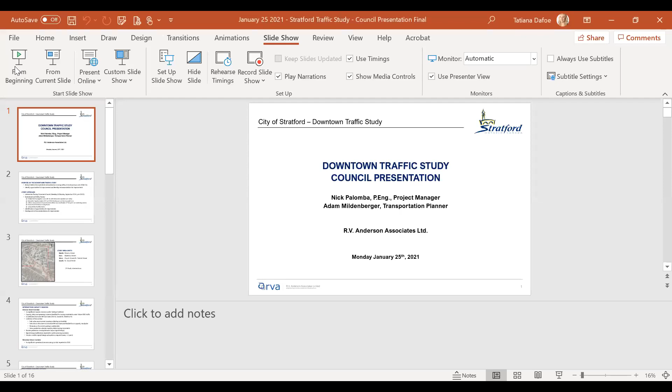All right. Good afternoon, Mr. Mayor and members of council. I'd like to thank you on behalf of myself and Adam Mildenberger for giving us the opportunity to come in and provide you a brief summary of the downtown traffic study that was completed on behalf of the city and the findings of it. I'll try to keep my presentation to about 10 minutes. I think I'm going to run just a little longer when I was looking at my slides, but I'll try to move through it as quickly as possible. Please move on to the next slide.

So quickly, overall, the purpose of the downtown study was to analyze intersection operations and look at pedestrian crossing safety within the downtown core of the city. We wanted to identify opportunities for improvement and develop some recommendations around these opportunities for consideration by the city. In our overall study approach, a big part of it was collecting good data, and that data was collected both from a traffic perspective, getting new traffic volumes through weekdays and Saturdays. This was all done in 2019, pre-impacts by COVID, and also was supplemented with a series of other data involving a lot of field observation of travel behavior, pedestrian behavior, how different things are actually operating in the field, especially on the weekends in the more congested setting.

We reviewed collision data for the last 5 years, and we focused also on pedestrian crossing opportunities along Downie Street. And we had a few cycling facility feasibility reviews that we were asked to consider as part of the study. Next.

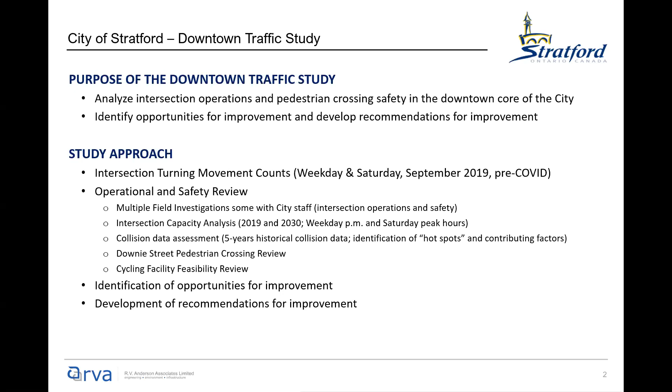Our overall study limits were bounded by Ontario Street on the north, Waterloo on the east, Church and St. Patrick's on the west, and St. David Street on the south. There's a total of 23 intersections. That was a combination of signalized and unsignalized intersections that we looked at and assessed in one form or another. Next.

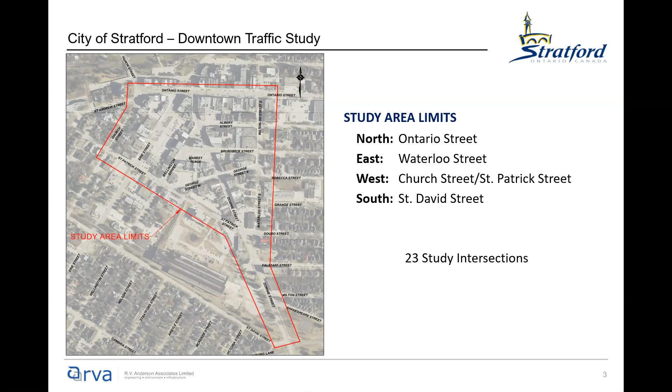High level, there were 4 corridors. The Ontario Street corridor, today, there's really no significant capacity concerns. There's operational issues today in terms of the turning traffic, but capacity was not necessarily an overarching issue. As part of the study, what we looked at was a horizon year or a future year of 2030. And what we did is we forecasted traffic to that year to determine how the intersections and roadways would behave and respond under those levels of demand.

And what we found, especially on the Ontario Street corridor, because of the lack of left turning lanes, we started to see a lot more delay and queuing that would accumulate within the corridor. When we look at the corridor, there's a number of limitations in terms of what you can do. It's a built urban environment; you really don't have an opportunity to widen the roadway unless you're going to trade off that space for something else. So we did look at a few options. We looked at reducing through lanes to introduce left turn lanes to better accommodate the delayed and turning vehicles. And that really, from a capacity standpoint, didn't result in a viable solution.

We looked also at the elimination of on-street parking, as undesirable an option as it was. And again, not recommended, for the main reason that parking is required in the downtown and is one of the main supporting features for the businesses. And the other part is the heavy pedestrian volumes, which impede turning movements. But again, we have to put priorities on things. The pedestrians are a big part of the environment and they do need to be accommodated. So what we tried to do is focus on how we can better accommodate pedestrians.

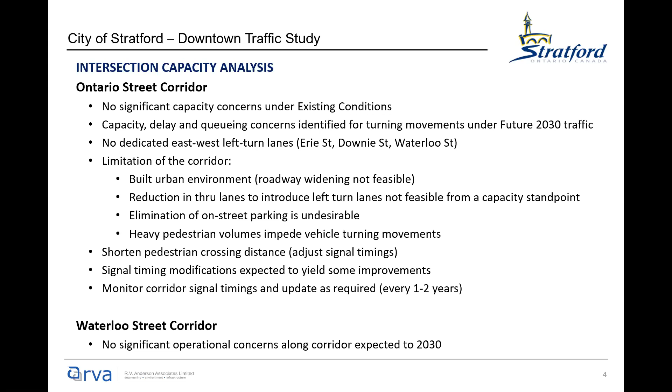In a lot of areas, there's long crossing distances where the pedestrians are exposed to traffic as they cross, and that exposure also means long signal timings for them. So we looked at opportunities to shorten the crossings. We looked at opportunities to modify signal timings at your signalized intersections wherever possible. And we're also suggesting a monitoring program for your corridor traffic signals, a regular review every 1 to 2 years at a minimum, or if something significant happens, something a little more frequent. The Waterloo corridor, right up into the year 2030, we didn't find any capacity concerns. So from an operations perspective, there really were no recommendations there.

Next slide, please. Erie Street, the main intersection on Erie, not including the Ontario intersection, was the intersection at St. Patrick's. We found that under 2030, we'd start to see some longer queuing of traffic, but with the modeling we did, we've shown that by adjusting the signal timings, that can be accommodated and that issue will go away. So no geometric modifications required. And on the Downie Street corridor, there were no significant operational concerns all the way to 2030. We have the intersection at Wellington, Albert, and Downie, which in the longer term behaves as it does today. Traffic on the side streets, Wellington and Albert, does face delays trying to enter or cross the street because of a combination of the volume on Downie and also pedestrians.

The intersection's not at the point of requiring signalization. It would be about the only solution for the area, but the short distance between this intersection and the Ontario Street intersection would make signalization not really desirable. So we're not recommending improvement, but we're recommending monitoring of this. The delays are getting higher, but overall the intersection still operates at a good level of service. So it's just a level of inconvenience for traffic wanting to enter Downie.

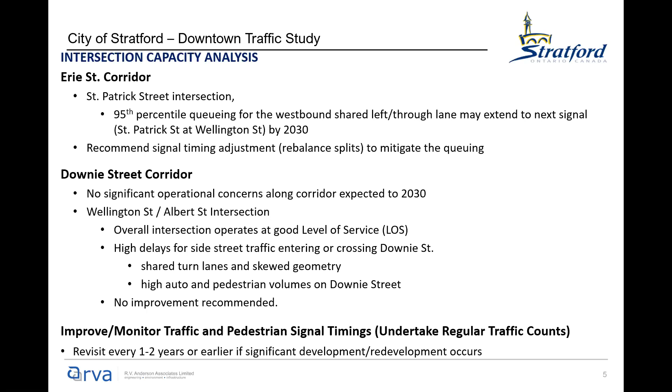And I touched on this just a moment ago: a practice for the city to take on revisiting and monitoring of signal timings every 1 to 2 years. And as I say, when there's a significant development or redevelopment in the area where travel patterns might change, it's always good to stay on top of that. What that would require is undertaking some regular traffic counting at your signalized intersections. And then staff can utilize that data to determine whether the timings are coordinated the best for traffic at that time. Next, please. So what I'd like to do now is look at all that analysis.

It's a very large intersection. There's a lot of pavement. There's a lack of definition out there. We have traffic from Huron turning onto Church at a high rate of speed. That very open geometry also invites a level of shortcutting that happens along Church to bypass the Erie intersection.

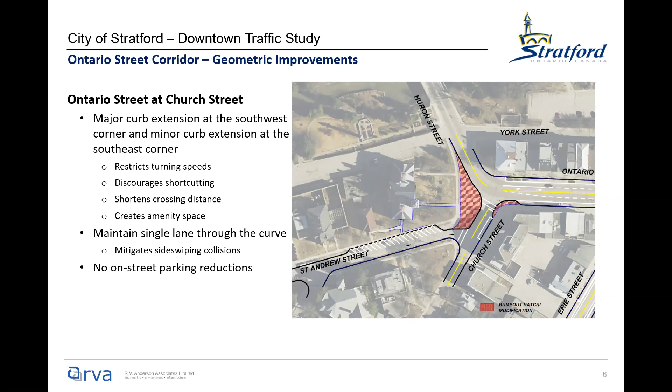Moving to the east from that intersection, we're taking a similar approach here. What we're looking at on these quadrants is wherever there is surplus space. So on the north side of the road, that's the Lakeside Drive side, we're just taking back some of the additional pavement. There's some very generous lanes out there, and we're trying to take that space back, provide it to pedestrians, and also shorten that pedestrian crossing distance again.

On the south side of the road, we're doing 2 things. At the intersection of Ontario and Erie, we've eliminated the very short right turn lane that exists there today, and we're increasing the on-street parking in that area. The big radius that's there today is to accommodate trucks turning. So what we've proposed here is what's called a truck apron.

So you have the red hatched area, which is the sidewalk area raised up, and that other area that's delineated is a lower curb that when trucks need a little bit more space for their back wheels to turn, they turn over that. But cars will follow the black line all the way around, which will slow down the rate of speed at which they turn, which was another pattern of collisions found there between the cars making that right and the opposing lefts turning.

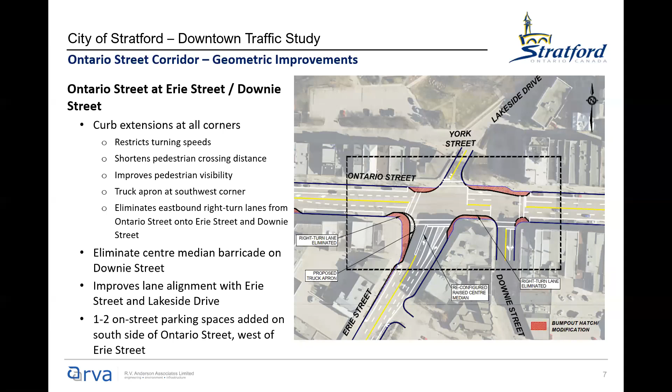The last piece that this one is focusing on is the short section between Downie and Erie. There is a very short right turn lane there. We're suggesting removing that, again, providing more pedestrian space. The reason for the right turn lane being there, I think, was just more from surplus pavement width. It doesn't really provide a big benefit or a function to the overall road operation. Next slide.

This is a short one. Ontario and Waterloo. At Ontario and Waterloo, there are a number of accidents here related to parking, sideswipes, also involving pedestrians. So same thing on the west side of the intersection. We'd like to pull the curbs out so that they are just inside the parking areas. What that'll do, again, is allow the pedestrians to stand out on the curb and be seen beyond the parked cars by approaching vehicles, and also give them a shorter exposed distance to cross.

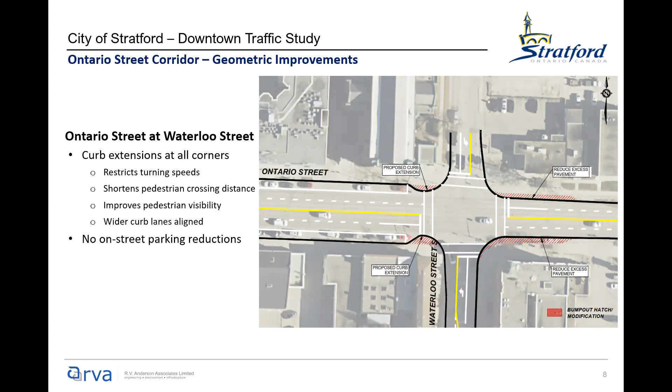On the east side, or right side, of the intersection, we have additional pavement width there. I believe on the south side there was on-street parking that was eliminated, and on the north side it's just some additional pavement width. And we're suggesting, again, get that pavement back into the pedestrian realm and align the curb line so you have a more balanced flow of traffic through the intersection. And again, you end up with a shorter crossing distance for people walking across Ontario Street. Next, please.

So on Downie Street, we looked at providing pedestrian crossing opportunities, and we've identified two. This is the first of two. This one is at the intersection of George and Downie. What we're recommending there is, again, some curb extensions, which you see. The curb extensions will accommodate the vehicles that have to make the turns, but also, again, bring the pedestrians out beyond the parked cars, to provide the best visibility to them before they step out onto the road.

We are recommending, and you can see in the top left corner of the diagram, what is called a PXO. It's a level 2 type B. It has buttons on the poles on each side. So someone approaching will push the button, and you'll get the rapid flashing lights on both sides of the road. And we've also shown this with the arms, with the signs that hang over the road. The reason we've done that is, again, you have parking on both curb lines, and we want to make sure there's good visibility for the traffic that they are coming up on this particular feature.

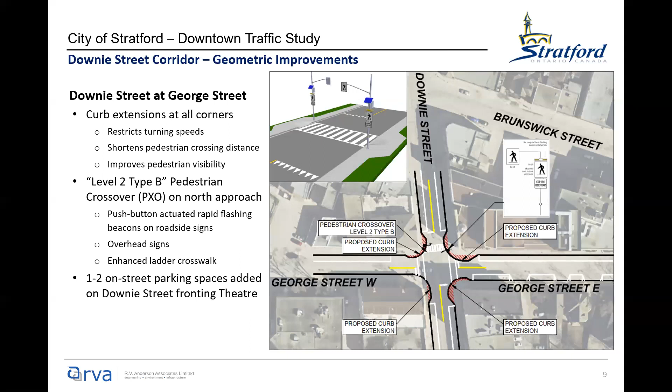Also with this one here, we were able to add 1 to 2 parking spaces on Downie Street in front of the Avon Theatre. So this one ends up with a little bit of additional parking as well. Next slide.

Moving down Downie, we looked at the intersection with Douro, St. Patrick, Downie, and Waterloo. There are a number of intersections within the city of Stratford which meet at very skewed angles, with issues of traffic making their turns, but also having good visibility, being able to turn your head around to decide whether there's a gap in traffic to complete your turn safely. At this location, there were a number of issues that were highlighted through a review of a lot of the collision reports.

At the intersection of Douro and Waterloo and Douro and Downie, that very short section which we're showing as being eliminated, there's the building on the corner. That building contributed to a lot of sightline issues, and there was really no solution to better that problem. What we focused on is ways to change the travel pattern and to get more standardized treatment. So the recommendation is this elongated offset intersection where Waterloo comes straight out to Downie, at almost a 90-degree angle.

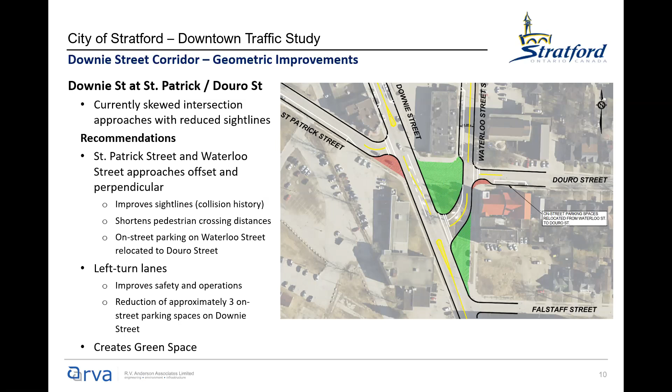And also there is a small loss of parking where St. Patrick comes in to Downie. Because of the left turn lane, there's 2 to 3 parking spots. They're the ones that are right near the word street on Downie Street there. They'd fall right in the intersection, and those would have to be clawed back. Next option.

So this is at Milton and the transit terminal. This also is our second location where we're proposing priority for pedestrians on top of other things. Currently, with the exiting traffic from the transit terminal, we know that they're completing most of their maneuvers based on courtesy gaps provided by traffic on street. It's not the most desirable solution, and as traffic continues to grow in the future, it probably will not be the safest solution. What we've looked at here is a mix of uses.

We have the transit terminal, we have the train station, we have the skate park, and just the overall recreational facilities in the area. And we also know now that people using the recreational facilities are crossing over to the transit terminal to use the washroom. So between the pedestrians generated by the terminal and what's there, plus with the recreational, we thought this would be the other ideal spot where we could provide a priority to the transit vehicles through a full signalized intersection.

And that full signalized intersection would have pedestrian push buttons and accommodations on all 4 approaches, which would then again provide controlled access for pedestrians and cyclists. The major roadway change here is we're recommending that Shakespeare would be cul-de-saced. However, the pedestrian sidewalk and cycling accommodation from Shakespeare out to Downie would be maintained. And we recapture some land and create some green space and some amenity area if the city wishes to do any type of parkette or celebration area or gateway feature.

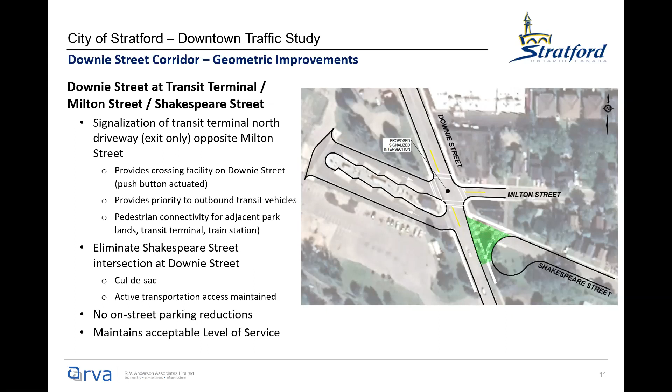There's no on-street parking reductions or changes of this, and the overall intersection operation and the corridor will work at a very good level of service. Next option. We were also asked to look at cycling and the possibility of incorporating cycling. One of the areas we were asked to look at was Erie Street. Next slide, please.

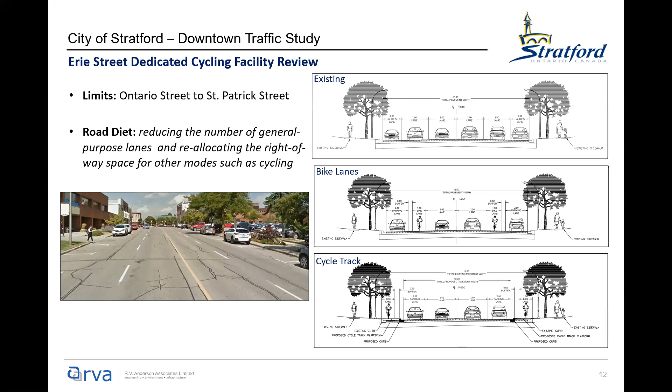So Erie Street right now is a 4-lane road with on-street parking on both sides. The 4 lanes are narrow in nature, but they do work given the fact that there are 4 there. The bike lane options, we looked at 2. One is leaving everything as it is, the curbs, all the features, taking away 2 of the travel lanes, maintaining parking, and then adding a bike lane with a painted buffer separating the bikes from the parked cars, just to provide some safety around door openings and those types of maneuvers. Click again, please.

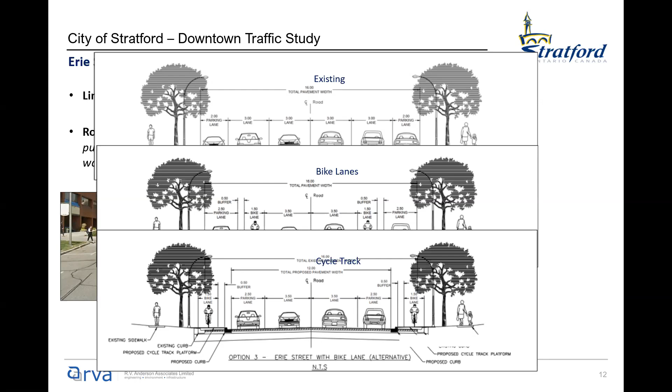The other one was looking at a cycle track, where you can see we've pulled the curbs in. So the road looks the same, 2 lanes plus parking, but we put the bikes on the outside where there's separation between them and the cars, and they'd be cycling off-road along the corridor. Next slide. So key to these accommodations would be to determine whether or not we could bring Erie Street down to 2 travel lanes of traffic for the near future. So we looked at 2030 and 2035 to see whether 4 lanes could be reduced to 2, and this major facility would still operate at a reasonable level of service.

What was determined was that at 4 lanes as it is today, all the way up to 2030 and 2035, the roadway is still going to operate at a good level of service. It's not going to have high level of delay. It'll be able to accommodate parking maneuvers, so as people are parking, you can still move around in the second lane. In the 2-lane scenario, by 2030 the road would be at about 90% of capacity, which is what we refer to as about a level of service E. And by 2035, it would be right at capacity.

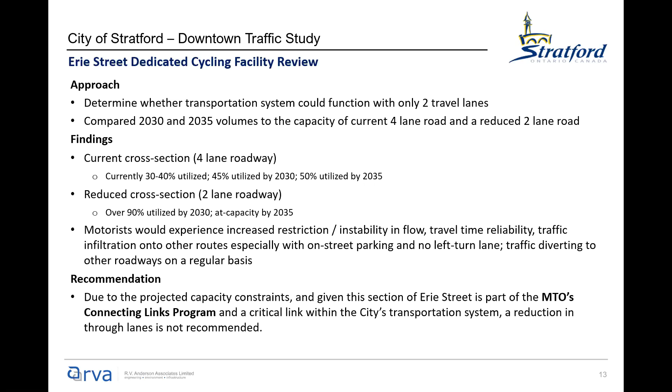And what you would experience here is bumper to bumper traffic. Travel time would be really inconsistent. When there are parking maneuvers or people wishing to park or turn into driveways, it would shut down the road from a flow perspective, increased delay. With this being such a significant road and also a connecting link in the truck traffic, we're recommending that the reduction from 4 to 2 lanes not be implemented from basically the section just south of Ontario to St. Patrick, which was the section we were asked to look at. Next slide.

We were also asked to have a quick look at Lakeside Drive. As part of the master plan, there was an interim recommendation to explore whether Lakeside Drive east of Waterloo could be converted to one-way operation to accommodate cycling. Staff had asked us if we could look at extending that one-way section west of Waterloo all the way down to Ontario. So that's the section highlighted in yellow.

What we did again is we identified the traffic that currently uses that section. We looked at what that would be today and what it would be in 10 years' time, 2030, and how that traffic would then complete its trips. And that's represented by the red lines you see there. And we did a series of scenarios. Some that traffic would get split between Waterloo and Ontario, some that would go on Ontario using Downie, Erie, or onto Huron, all based on where their original trips were going.

And what we found was that with the addition of this traffic to Waterloo coming down to Ontario, the section of Ontario, including the Waterloo intersection, the increasing number of turns at all these intersections and the lack of turn lanes there would break down the intersections. It would create congestion and queuing that would extend back through the intersections. Again, what we found was there isn't enough capacity on the roads to take this additional traffic. So we're not recommending that this particular section be considered for one-way conversion.

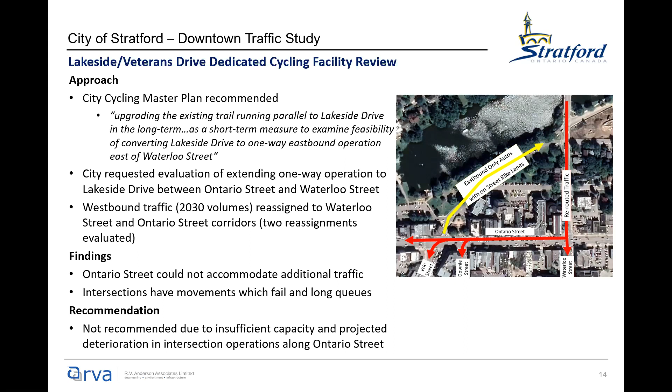Next slide, please. The last corridor we were asked to look at from a cycling perspective was Waterloo. We looked at two plans there. One was providing accommodations on street, and we also did a quick review of leaving the street as it is and trying to provide something behind the curbs. Generally, Waterloo ranges from about 8 and a bit meters up to 11 meters. It has 2 lanes for the most part. It has parking on one side of the road. It does alternate. And in the first 2 blocks, at the signalized intersections, we have some additional turn lanes.

So to introduce the bike lanes, we would remove all 11 on-street parking spaces. We'd have to remove the turn lanes at the signalized intersections. And in a few spots where it is narrow, we would have to widen, and there's a bit of tree and utility impact at those locations. The scenario where we looked at a full off-street cycling facility, given the number of mature trees on that stretch, we just didn't feel that was a viable scenario. It would change the character of the road significantly.

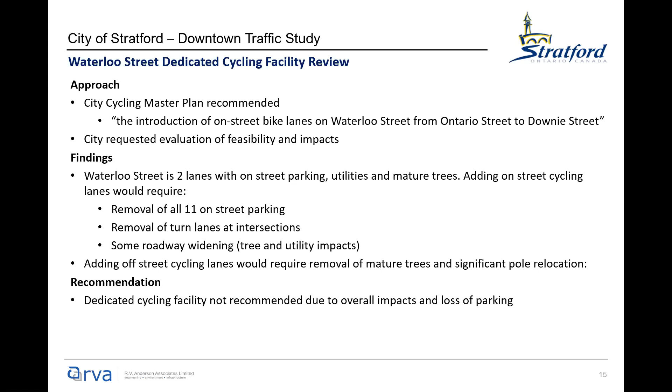So again, for this particular corridor, we didn't find a method to provide a dedicated facility. It doesn't eliminate the ability for cyclists to use it, but we didn't find a scenario that we felt was viable because, again, the premise we've been working with in the study was that on-street parking is a key element within Stratford, and a significant removal of it would not be considered viable. Next. I know I've gone pretty quick. I'd like to open it for questions, and maybe I can spend a little bit of time on elements that members of council might have questions about.

Sure. Councillor Clifford, then Councillor Henderson, Councillor Vasilakos. Go ahead, Tom. Thank you, Mayor. I was going to ask, I get a lot of calls about people going down Erie Street, turning left onto Ontario Street, and the traffic backs up. And it isn't in here anywhere. Is there a way to solve that problem with people turning left onto Ontario from Erie? Yes, so this would be turning left onto Ontario to go to Huron? That's correct. Okay.

What we tried to focus on at that particular intersection was the challenge. One of the challenges with your traffic signals is because you have a lot of pedestrians, you have to accommodate the time it takes them to cross the street and the volume. That whole storyline I talked about, shortening those crossing distances. When we do that, it gives your traffic staff the ability to take those seconds of green time and give them to other movements like an advanced green for a turn. That's how we are proposing, at many signalized locations, to provide an increased level of operation by redistributing that green time. We're not rushing pedestrians across the street, we're shortening the distance they have to cross. So that time can be redistributed.

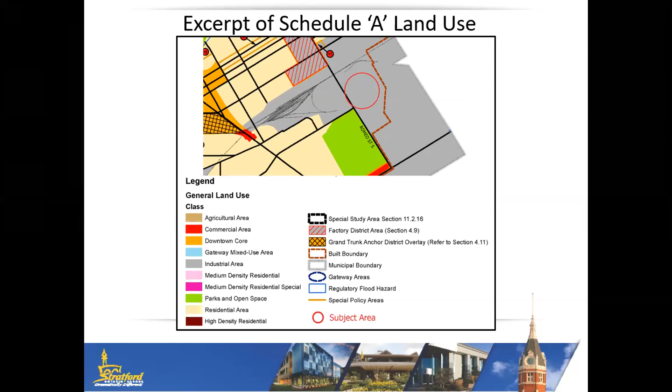The lands are zoned general industrial I2, and it requires parking to be provided at a rate of 1 space for every 80 square meters for an industrial use and 1 space for every 100 square meters for a warehouse use. The applicant is proposing a rate of 1 space for every 50 square meters for the athletic training facility. They are proposing to limit the size of the athletic club to 4,080 square meters, which results in a requirement to provide 82 parking spaces for the athletic training facility.

The planning justification report states that the operating hours for this facility would be primarily in the evenings. This will provide additional parking spaces for overflow parking as business operation times are offset. Based on the maximum occupancy and size of the facility, the hours of operation of the businesses, and the transit route, the proposed parking rate would be sufficient to provide adequate off-street parking for the subject lands. We have received agency comments, and most of these comments were brought up at the public meeting.

Building services do not have any concerns with the application. They noted that they did not apply for the original building permit, and they were asked to discontinue work on the property until the zone change was approved. Engineering services also do not object to the zone change. They've noted that a road widening and a sidewalk will be required through the site plan application. Transit Division and the Township of Perth East also have no concerns.